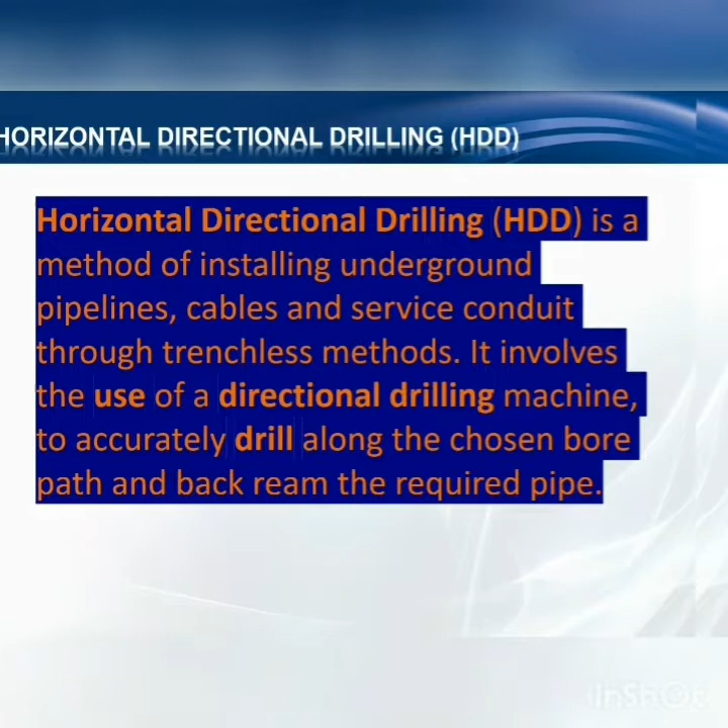This is horizontal directional drilling, HDD. It is a method of installing underground pipeline, cable or conduit where it is not possible to excavate the road due to heavy traffic or many utilities.

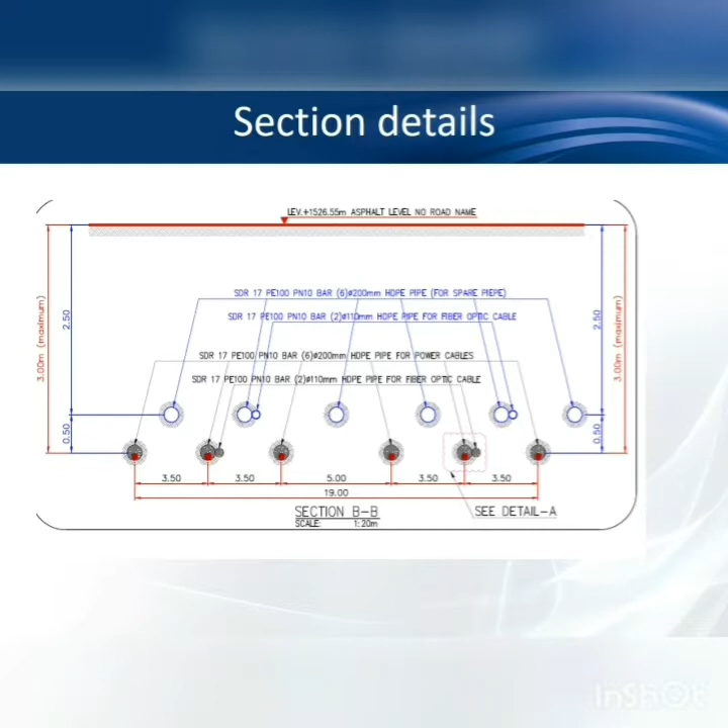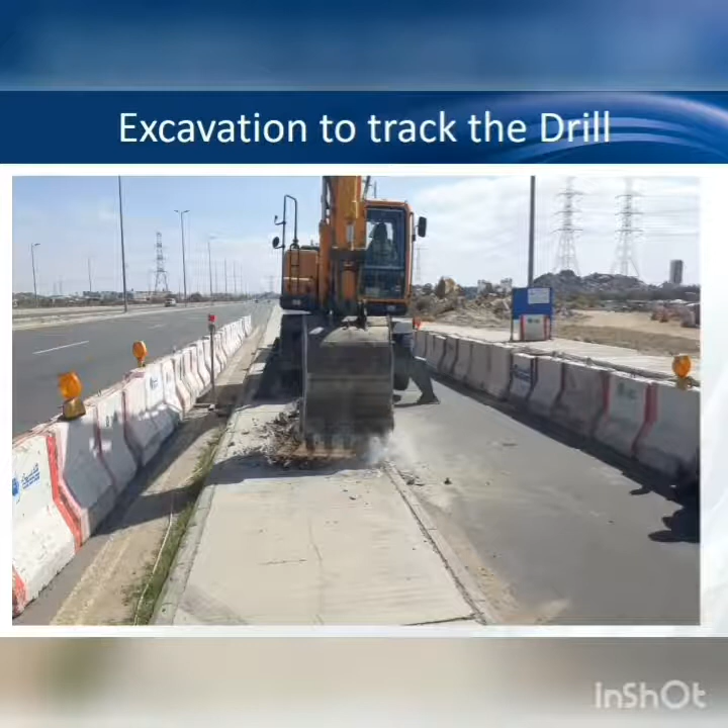Go through the plan and section details for each dimension and distance from the top of the asphalt. Make sure of the diameter of the pipe and its capacity. It should match exactly the specification and standard.

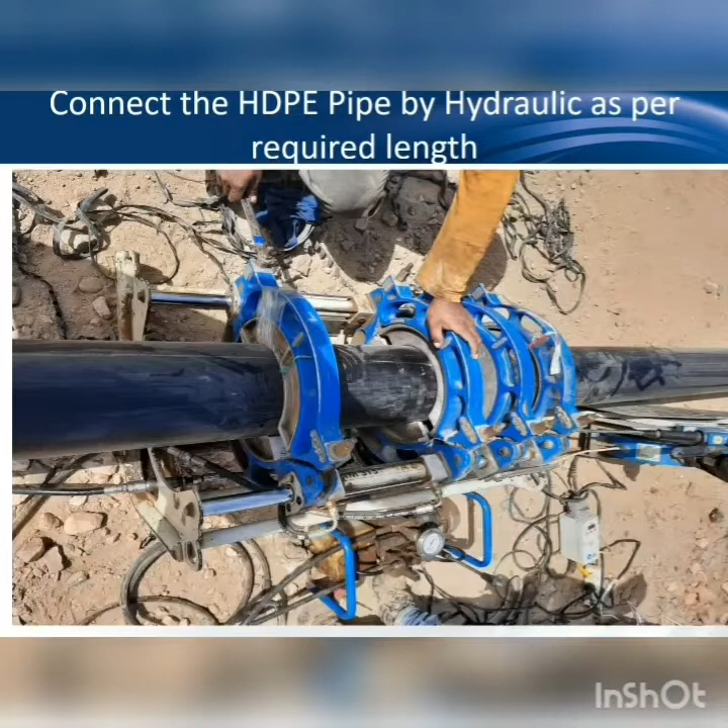This is the connection detail. You have to go through the complete connection detail for connecting the HDPE pipe. It is connected by hydraulic machine applying pressure. It is a 200 mm dia HDPE pipe.

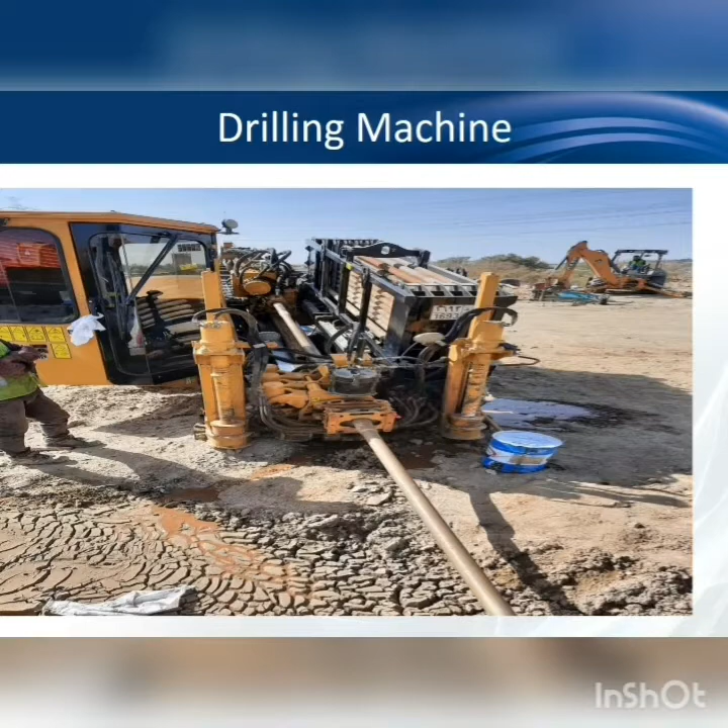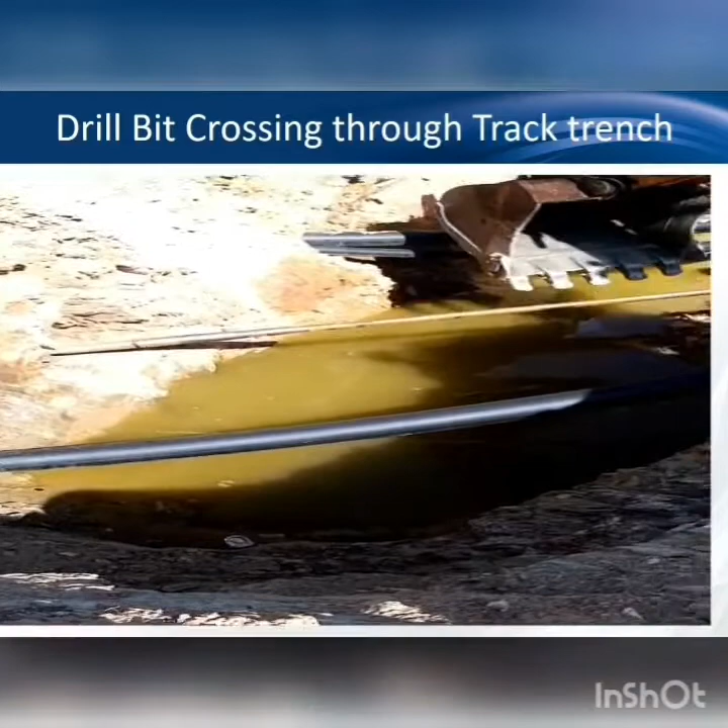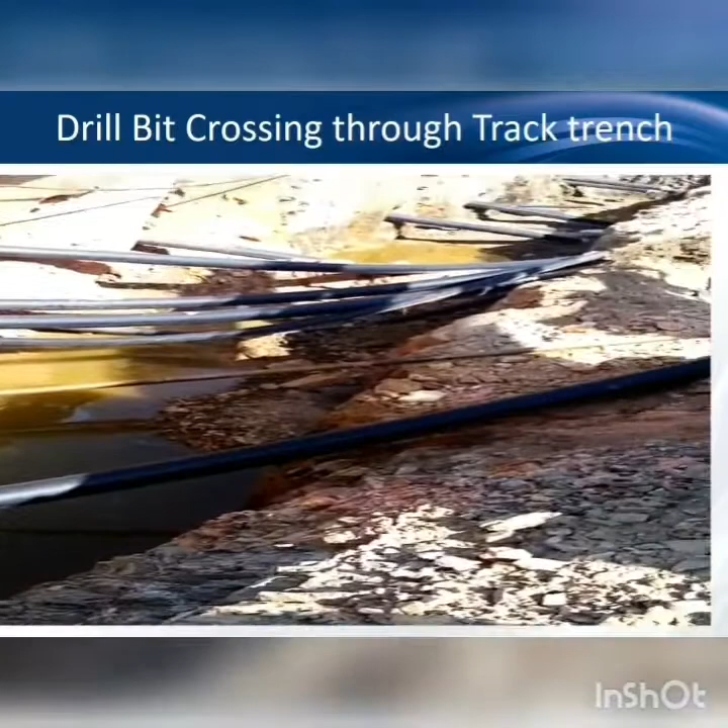Okay, this is the drilling machine we will use for drilling. We are going to start from the start point. In between, there is a mid span after 5 meters from the starting point. It is called the cable trench tracker point; you can consider it a monitoring point. This is the drilling machine. We are going to start now.

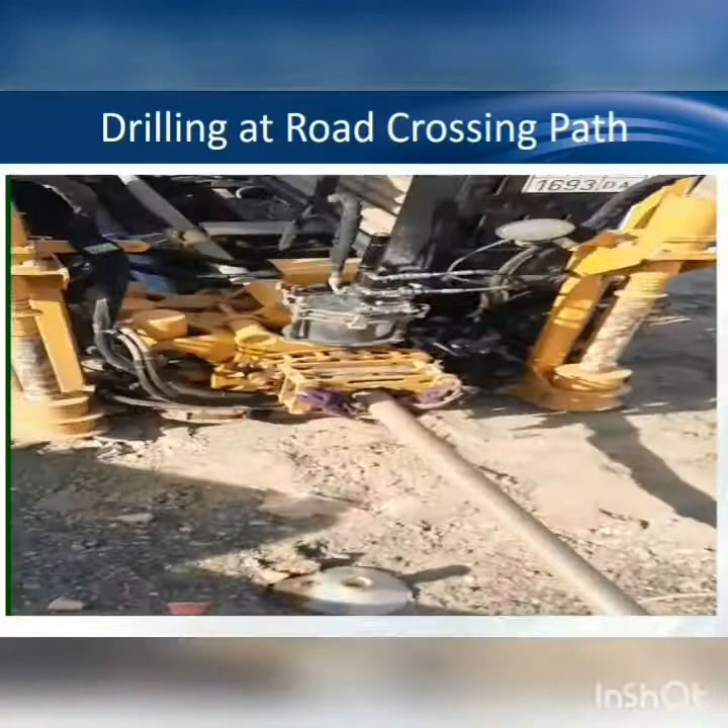Prior to drilling, you should check all the third party certification, TUV certification and signages for purpose and use. This is how it works. The drilling machine will insert the pipe after coring a little bit. Once the coring is finished, it will insert the pipe and start working.

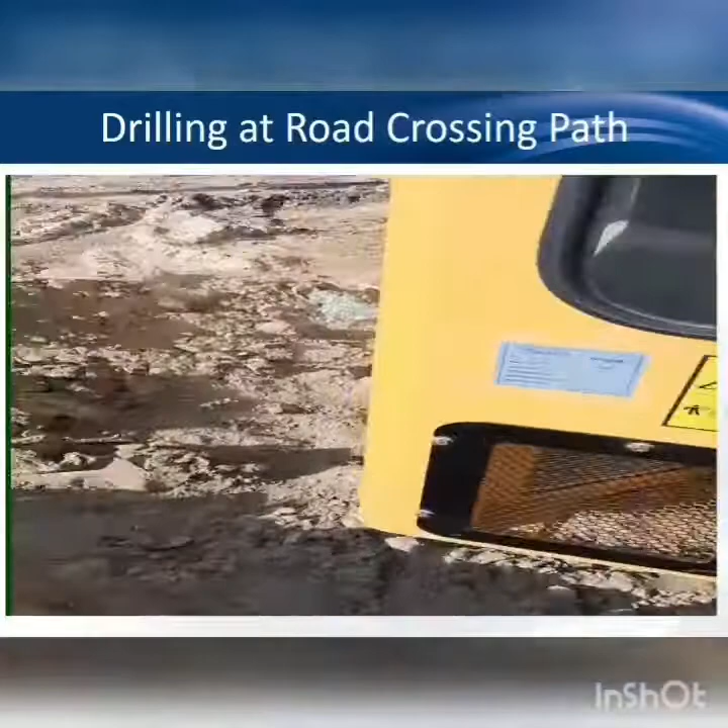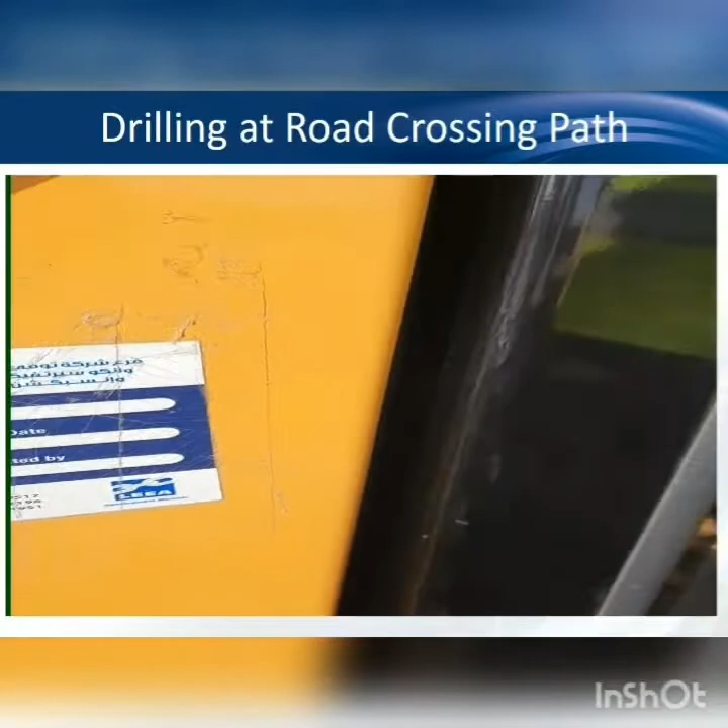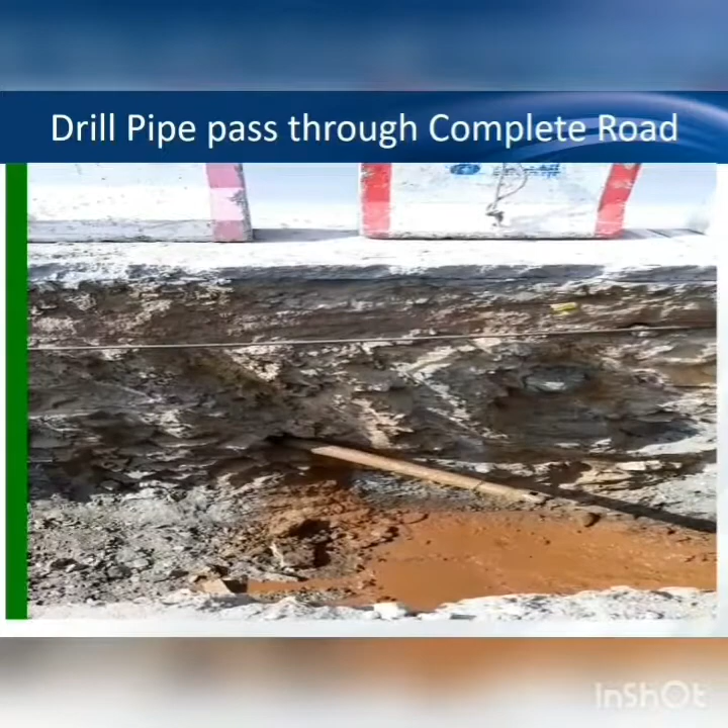As you can see, it is inserting. I was asking you for the third party certification and signages for the drilling machine to avoid any mishap at site. See, it is coming through the whole cable road length. It has passed through completely.

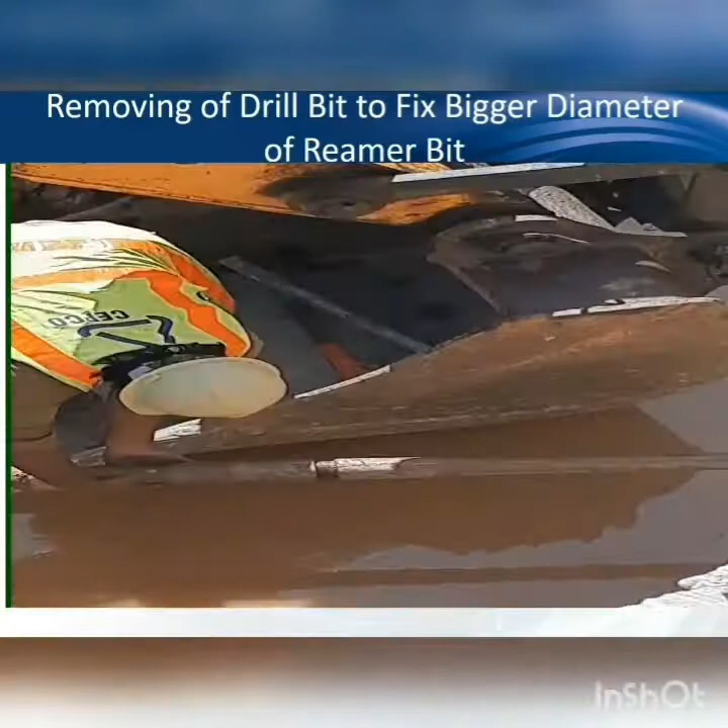Drilling has been completed. Now we will remove the drill bit and attach the reamer bit, a little bit bigger dia, to increase the borehole diameter. Once the borehole diameter increases, we have to attach a tire or any rubber material for cleaning purpose.

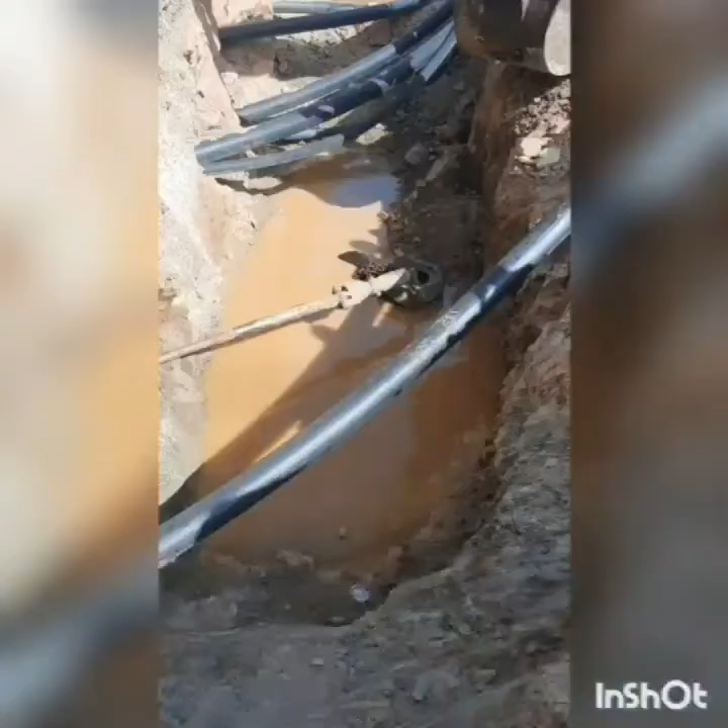During HDPE pipe pulling, you will face problems if any sharp edges or debris are inside. So it is better to clean it prior to pulling the HDPE pipe. Now we are going to start the cleaning process. With this reamer, we will take it back to the machine.

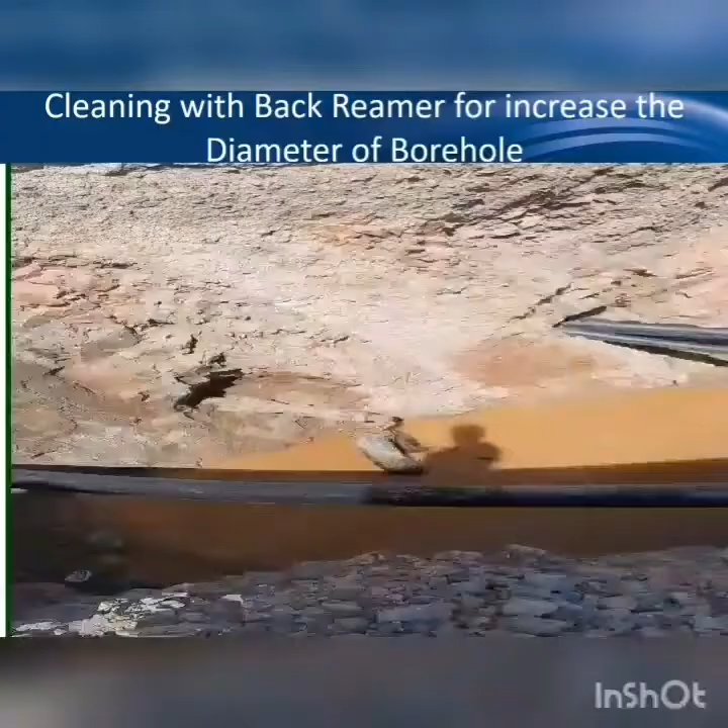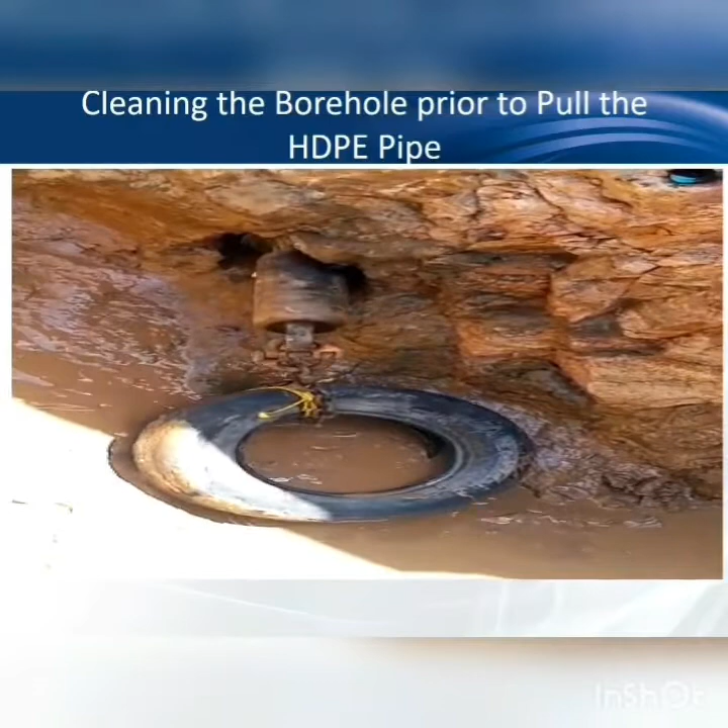Back reamer with tire to clean the debris and excess material inside after reaming back. As you can see, it is going back.

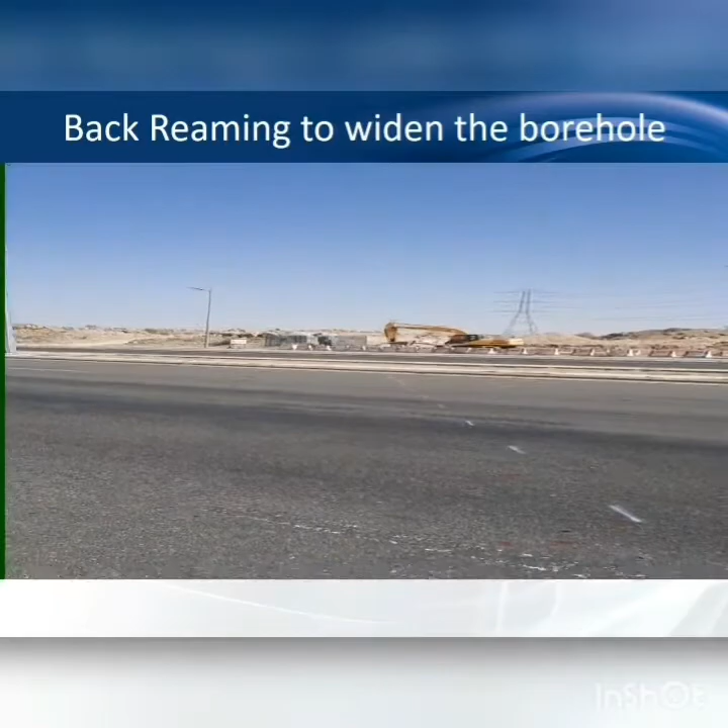During this process, you will face many troubles due to breakdown of pipe or debris inside. Once you finish the cleaning, you can pull the cable pipe, the HDPE pipe conduit.

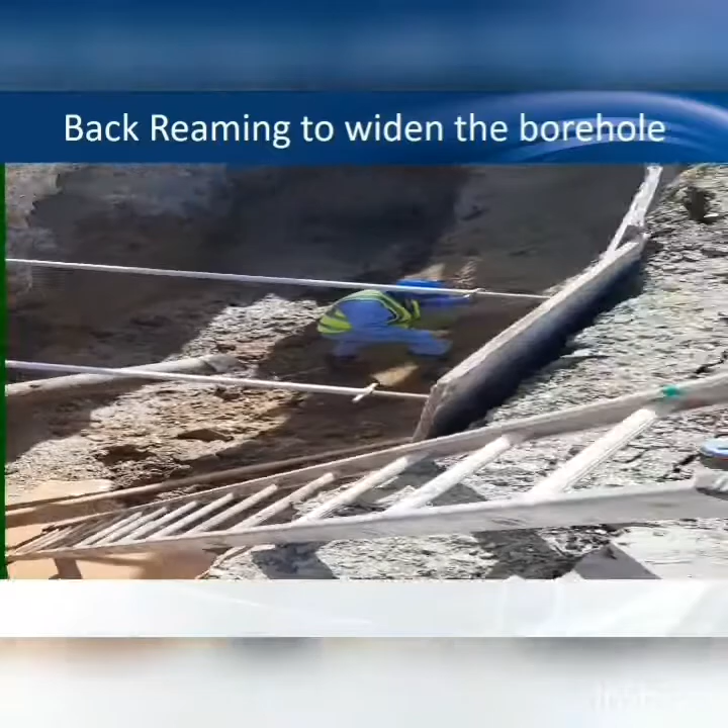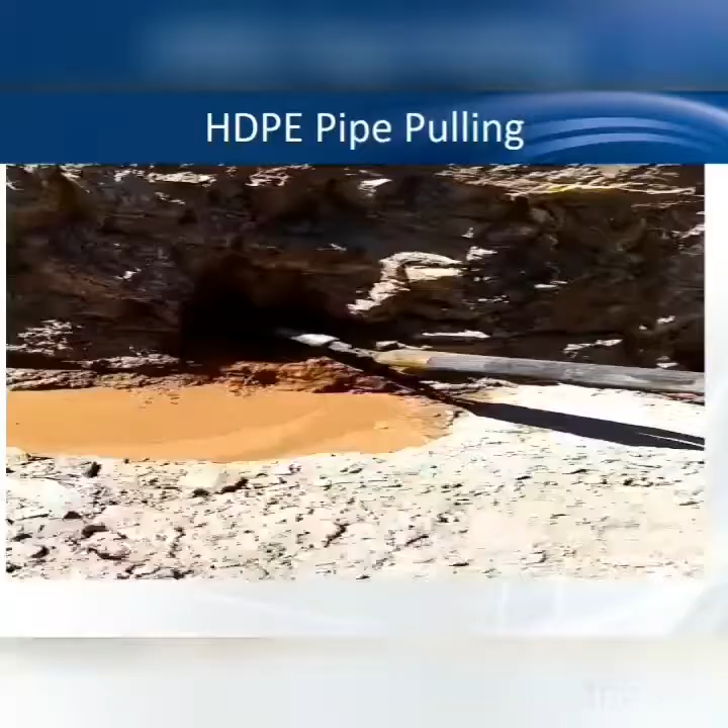You can see this is the trench point, the monitoring trench. Once you start from the drilling machine, you can check whether it is going in the right direction or wrong direction. Now it is pulling back the HDPE pipe, 200 mm dia.

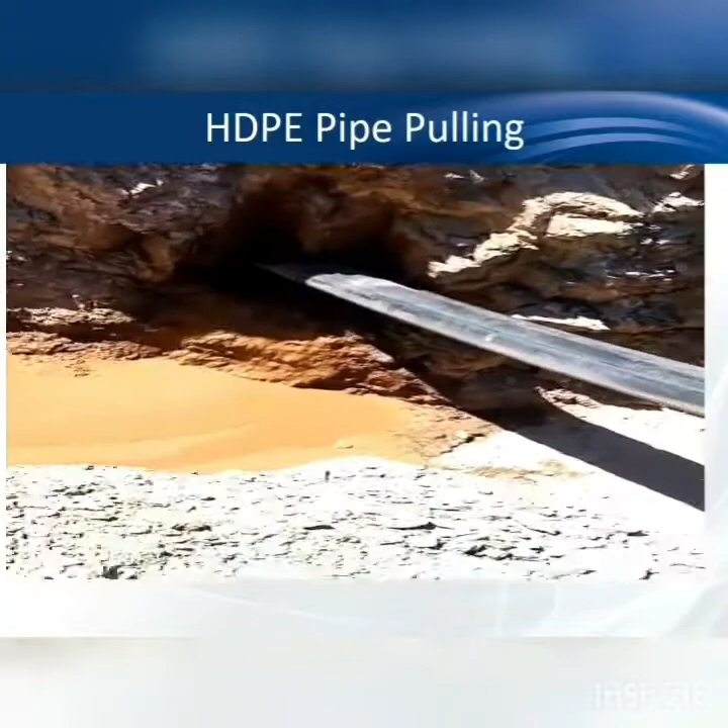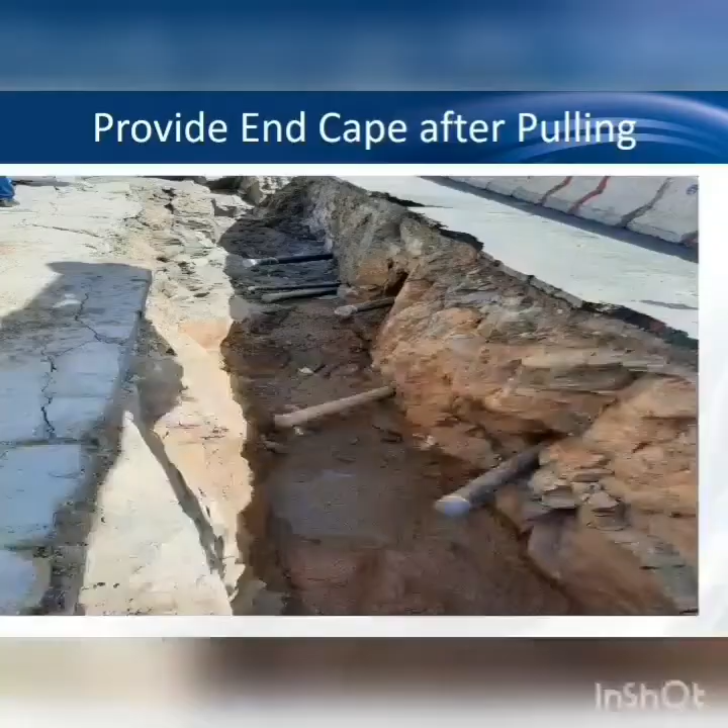In future they will pull the cable inside this HDPE pipe. This is HDPE pipe, 200 mm dia for power cable and 110 dia for fiber optic cable. One circuit has one. This is the end cap. You have to install the end cap at the end once you finish.